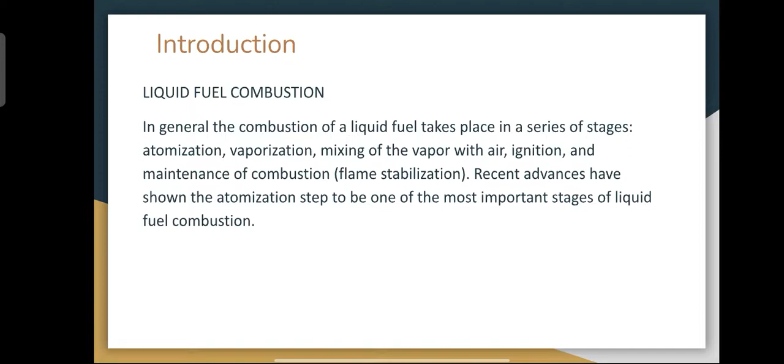Liquid propellant rocket. A liquid propellant rocket or liquid rocket utilizes a rocket engine that uses liquid propellants. Liquids are desirable because they have a reasonably high density and high specific impulse, that is ISP. This allows the volume of the propellant tanks to be relatively low.

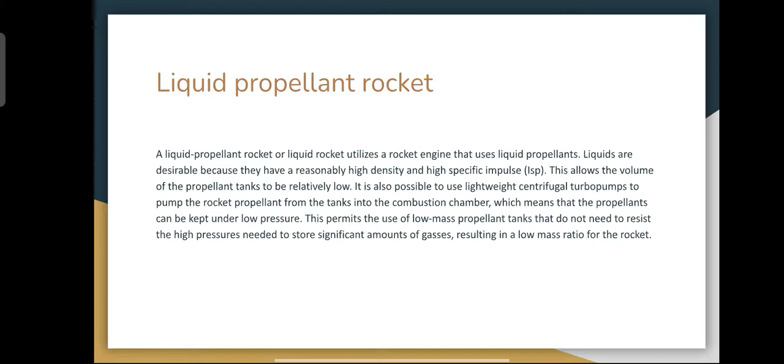It is also possible to use lightweight centrifugal turbopumps to pump the rocket propellant from the tanks into the combustion chamber, which means that the propellants can be kept under low pressure. This permits the use of low mass propellant tanks that do not need to resist the high pressures needed to store significant amounts of gases, resulting in a low mass ratio for the rocket. So this is the diagram of the rocket.

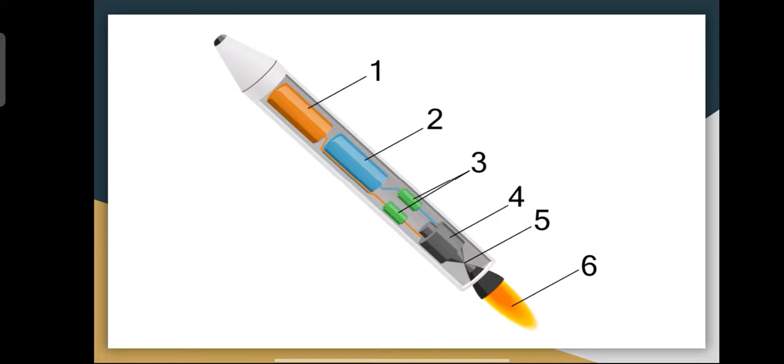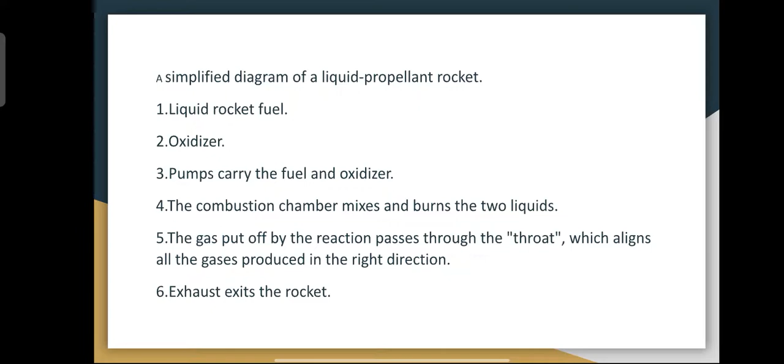So this is the simplified diagram of a liquid propellant rocket: the first one is liquid rocket fuel, the second one oxidizer, the third one pumps carry the fuel and oxidizer, and the fourth one is the combustion chamber, which mixes and burns the two liquids, and the fifth one is the gas put off by the reaction passes through the throat, which aligns all the gases produced in the right direction, and at last exhaust exits the rocket.

An inert gas stored in a tank at a high pressure is sometimes used instead of pumps in simpler small engines to force the propellants into the combustion chamber. These engines may have a higher mass ratio but are usually more reliable and are therefore used widely in satellites for orbit maintenance. Liquid rockets can be monopropellant rockets using a single type of propellant or bipropellant rockets using two types of propellant. Tripropellant rockets using three types of propellant are rare.

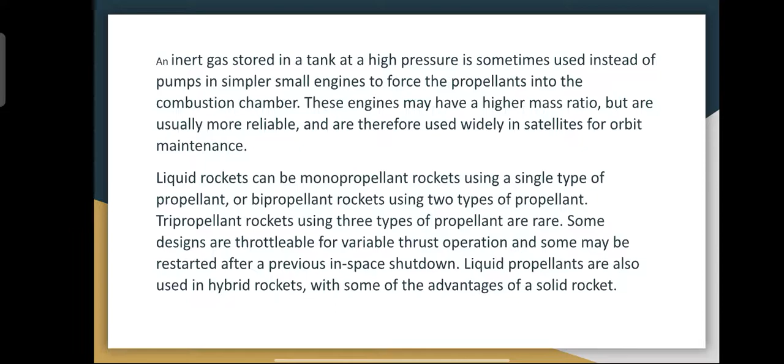Some designs are throttleable for variable thrust operation, and some may be restarted after a previous in-space shutdown. Liquid propellants are also used in hybrid rockets, with some of the advantages of a solid rocket.

And the next one is principle of operation. All liquid rocket engines have tankage and pipes to store and transfer propellant, an injector system, a combustion chamber which is very typically cylindrical, and one, sometimes two or more, rocket nozzles. Liquid systems enable higher specific impulse than solids and hybrid rocket motors and can provide very high tankage efficiency.

For injection into the combustion chamber, the propellant pressure at the injectors needs to be greater than the chamber pressure. This can be achieved with a pump. Suitable pumps usually use centrifugal turbopumps due to their high power and light weight, although reciprocating pumps have been employed in the past. Turbopumps are usually extremely lightweight and can give excellent performance with an on-earth weight well under 1% of the thrust.

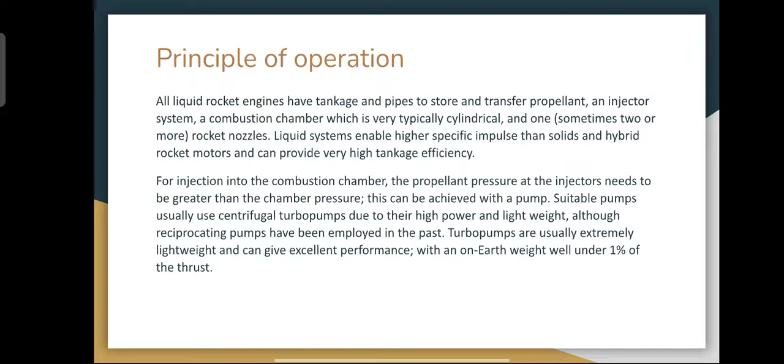And the next one is combustion stability. To avoid instabilities such as chugging, which is a relatively low speed oscillation, the engine must be designed with enough pressure drop across the injectors to render the flow largely independent of the chamber pressure. This pressure drop is normally achieved by using at least 20% of the chamber pressure across the injectors.

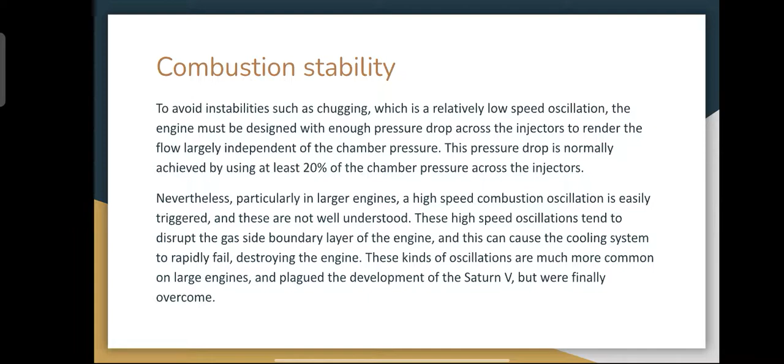Nevertheless, particularly in larger engines, a high speed combustion oscillation is easily triggered, and these are not well understood. These high speed oscillations tend to disrupt the gas side boundary layers of the engine, and this can cause the cooling system to rapidly fail, destroying the engine. These kinds of oscillations are much more common on large engines and plagued the development of the Saturn V but were finally overcome.

Some combustion chambers, such as those of the RS-25 engine, use Helmholtz resonators as damping mechanisms to stop particular resonant frequencies from growing. To prevent these issues, the RS-25 injector design instead went to a lot of effort to vaporize the propellant prior to injection into the combustion chamber. Although many other features were used to ensure that instabilities could not occur, later research showed that these other features were unnecessary and the gas phase combustion worked reliably.

Testing for stability often involves the use of small explosives. These are detonated within the chamber during operation and cause an impulsive excitation. By examining the pressure trace of the chamber to determine how quickly the effects of the disturbance die away, it is possible to estimate the stability and whether redesign features of the chamber are required.

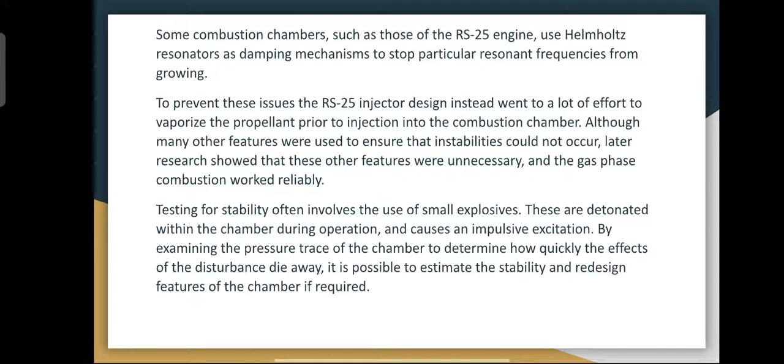And the next one is engine cycles. For liquid propellant rockets, four different ways of powering the injection of the propellant into the chamber are in common use. Fuel and oxidizer must be pumped into the combustion chamber against the pressure of the hot gases being burned, and engine power is limited by the rate at which propellant can be pumped into the combustion chamber.

For atmospheric or launcher use, high pressure and thus high power engine cycles are desirable to minimize gravity drag. For orbital use, lower power cycles are usually fine. Some of them are pressure fed cycle, gas generator cycle, expander cycle, staged combustion cycle.

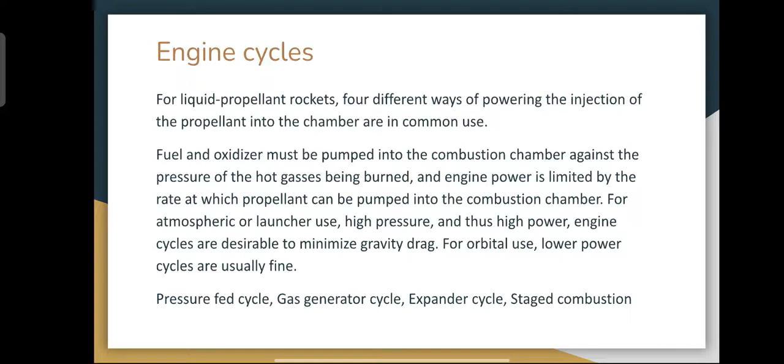The next one is cooling. Injectors are commonly laid out so that a fuel rich layer is created at the combustion chamber wall. This reduces the temperature there and downstream to the throat and even into the nozzle and permits the combustion chamber to be run at a higher pressure, which permits a higher expansion ratio nozzle to be used, which gives a higher ISP and better system performance. A liquid propellant engine often employs regenerative cooling, which uses the fuel or less commonly the oxidizer to cool the chamber and nozzle.

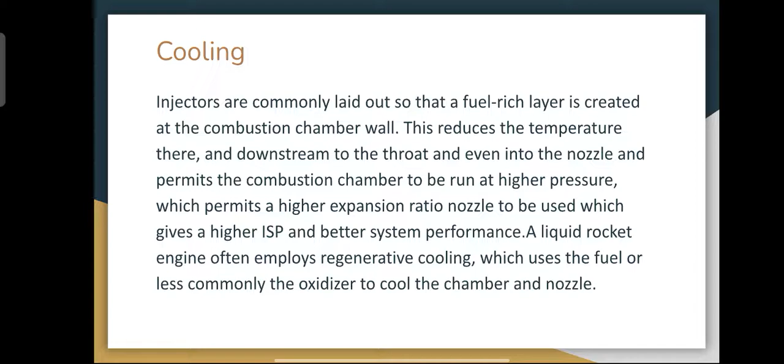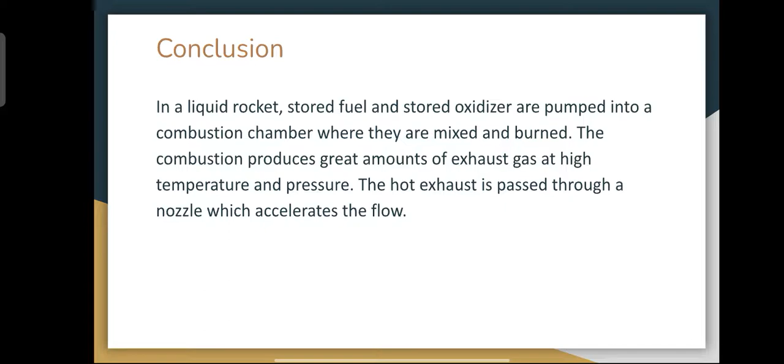Conclusion: in a liquid rocket, stored fuel and stored oxidizer are pumped into a combustion chamber where they are mixed and burned. The combustion produces a great amount of gas at a high temperature and pressure. The hot exhaust is passed through a nozzle which accelerates the flow.